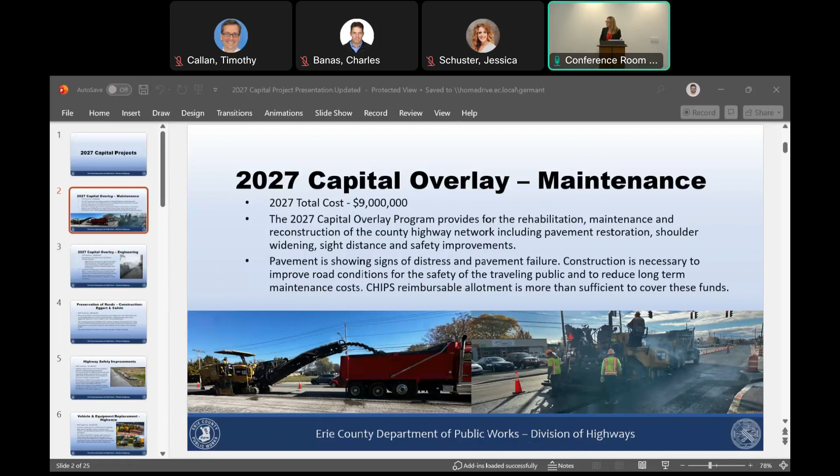Any questions on this one? Our second request is similar. It's the capital overlay engineering. These are the ones that are designed and bid out. You'll often hear us talk about overlay A or overlay B on our more heavily trafficked roads that need a little bit more work. We are requesting 10 million.

Some of the ones under consideration to receive this funding would be Ridge Road from Abbott to Seneca. This area needs some drainage work and resurfacing. Also Eggert Road from the City of Buffalo line to Main Street, which has a road score of 5. Ridge to Abbott has a road score of 6. We also have French Road from Union to Transit under consideration, with a road score of 4. Or any other capital overlay that could be considered with that funding, which would include resurfacing, drainage improvements where needed, safety, and inspection.

I have a question. If this was approved at $10 million, what are we looking at, one project, two of the projects? This would likely not be all of them that are listed. My understanding is the ones closer to ready would be Eggert and French, so potentially looking at 2.

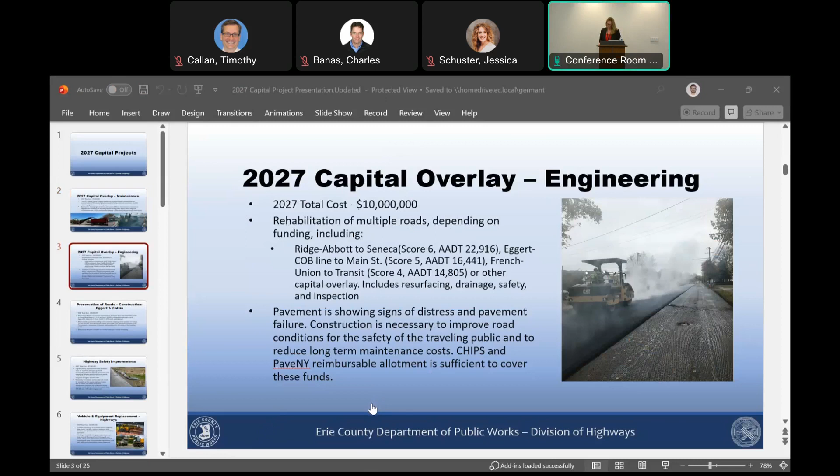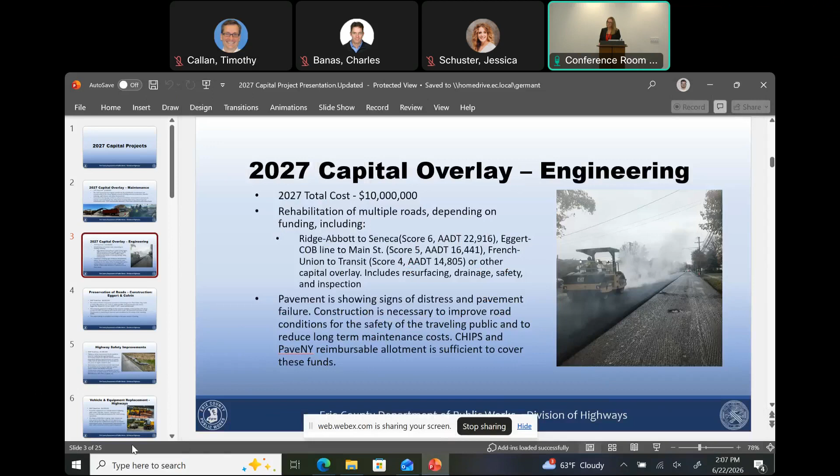Any other questions? And just to set the table too, I think our CHIPS, the whole emergency winter weather recovery CHIPS, pave over potholes, is for reimbursables almost $21 million. You get a chance, can you send me the new letter? Yes.

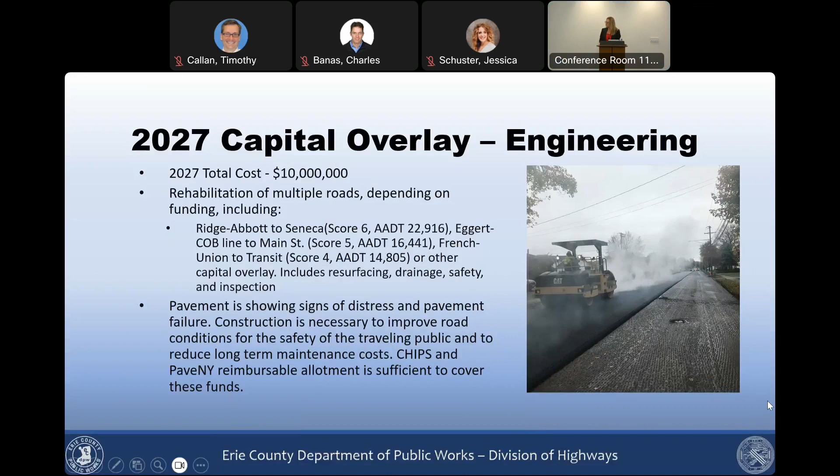Our next request is probably very familiar to a lot of people in this room. This is for construction of Eggert and Colvin. If you're familiar with this stretch, this is between Twin Cities Highway and Colvin Boulevard. It is a short stretch and an expensive one, 0.42 miles. This is the one that has a significant amount of concrete underneath, and also has 8 lanes going across, at the junction of the I-290 ramps.

We've done some emergency joint repairs, but the pavement continues to deteriorate and construction is necessary to improve road conditions. The design is complete, so it would be ready to bid upon receipt of the funding if we receive it.

Would this be replaced with all blacktop, or do we also do concrete? This one would be all blacktop, right? So it'd be a mix, I think, of concrete and blacktop. The concrete, I think it's almost 30 years since it was last rehabilitated. They'd have to remove all of it, but New York State DOT... this one moved up quite a bit from last year. Is it because of the deterioration?

Yeah, and New York State DOT is doing the north section basically from the 290, just north. We only own, like Karen said, the 0.4 of a mile, but because it's 8 lanes, it comes in at almost a little over a mile. But DOT is doing Twin Cities Highway all the way north this year.

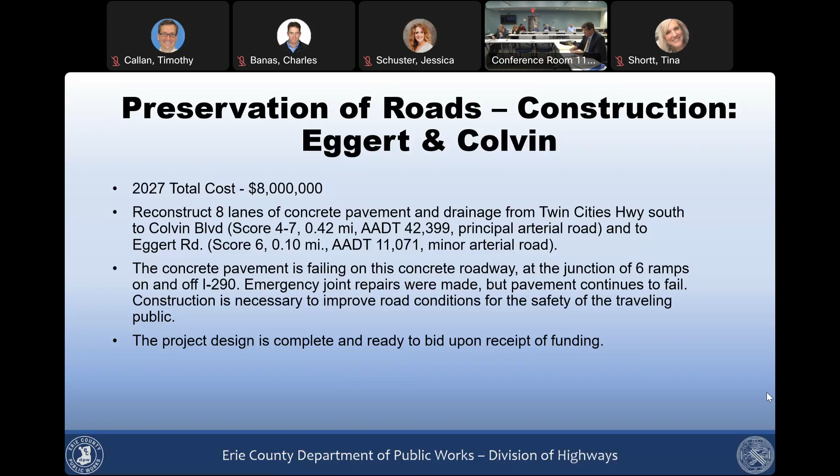The next request is for our highway safety improvements. These funds are used to replace damaged guide rail and correct recognized highway deficiencies, as well as upgrades to highway appurtenances and anything that is a hazard. For reference, we have 157 miles of guide rail, and we're constantly replacing it. Any car accident or damage that happens to the guide rail, we're replacing it, and we typically use all that we're allotted every year for these improvements.

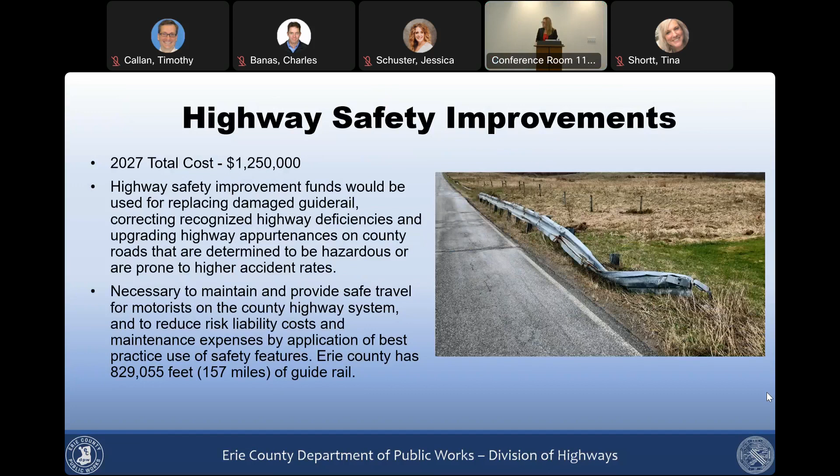Next request is for vehicle and equipment replacement. This is the same amount we requested last year. As you know, we're looking to replace at least 5 of our plow trucks every year. Those costs have gone up a little bit; our plow trucks are $300,000 each. We try to get a new one for each maintenance district, then we have to outfit them with sanders that are $25,000 each.

We mentioned the paint rig in here for our in-house striping. It's operational this year, but it's a matter of time before it needs to be replaced. That cost can be over $700,000 for that piece of equipment.

We've got some specialty equipment that needs to be replaced across the maintenance districts. We have a cat dozer as old as 1991 in our Clarence district, a $250,000 piece of equipment. A road widener, which we've used in one district, we're looking to get for one of the northern districts that often uses it to widen roads—that's another $250,000. We're also looking at a 20-ton roller to replace another 30-year-old outdated one in the Clarence district, over $200,000. We're also considering purchasing a grapple truck.

We're always trying to identify opportunities for grant funding. We were recently successful partnering with DEC for grant funding that got us a horizontal wood chipper we'll be able to purchase with funds in 2027. I bring up the grapple truck because that's something we'd get a lot of use from, knowing we could move it around the county. We often have to deal with fallen trees, windstorms, and helping out some of the towns. So that request is in there as part of the total request for equipment.

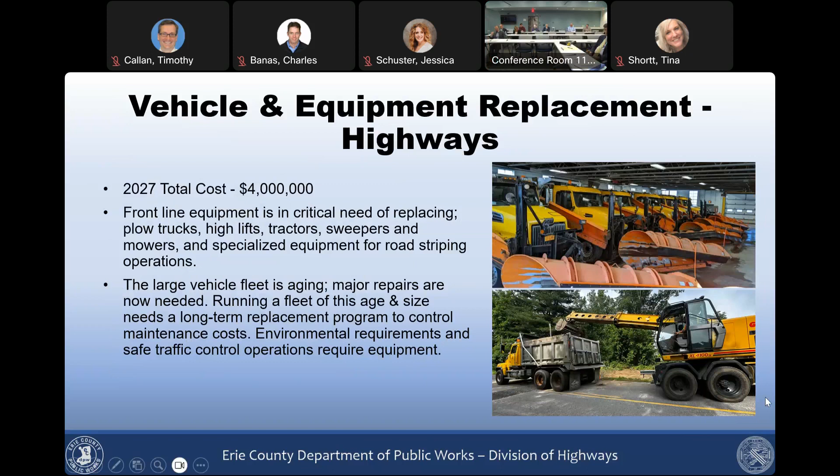Our next request is for federal aid Bridge New York construction funds. The total cost is $11,760,000. The county share would only be $2,432,000. The Bridge New York projects for construction are Boston State Road Bridge, Glenwood Bridge over Graff Brook, Glenwood Bridge over Sprague Brook, Neal Road Bridge, and other federal aid or Bridge New York projects.

They're all in various stages of deteriorated condition and need replacement.

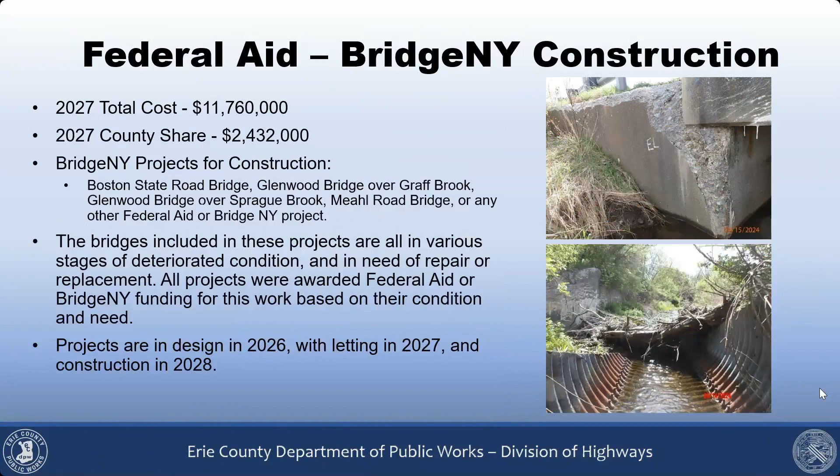They have been awarded through Fed Aid or Bridge New York, and according to the condition assessments, they're in design in 2026, and depending on which bridge, they'd be bid either in 2027 or 2028, depending on how much funding we have. Could you discuss the process for determining which bridges are included? I know a certain amount is dictated by the feds, and which ones you've submitted for are going to be funded, with often a lot of lag involved.

We submit the eligible ones for Bridge New York funding. Last round, I think we had 7 approved. Correct, 7 were approved. That's based on where it's located, but also the condition it's in. Bridge ratings go from 1 to 7 based on their condition.

A 7 would be a brand new bridge. The ones in the 3 to 4 range are in severe deterioration, or maybe they've received a red flag and we have to reduce the load posting or even close it down because of the deterioration. Bridge New York's MOU typically only allows us to get awarded 4, but this last round, New York State DOT was sitting on a large amount of Fed aid funding, so they asked for more candidates, and every candidate we sent in got selected.

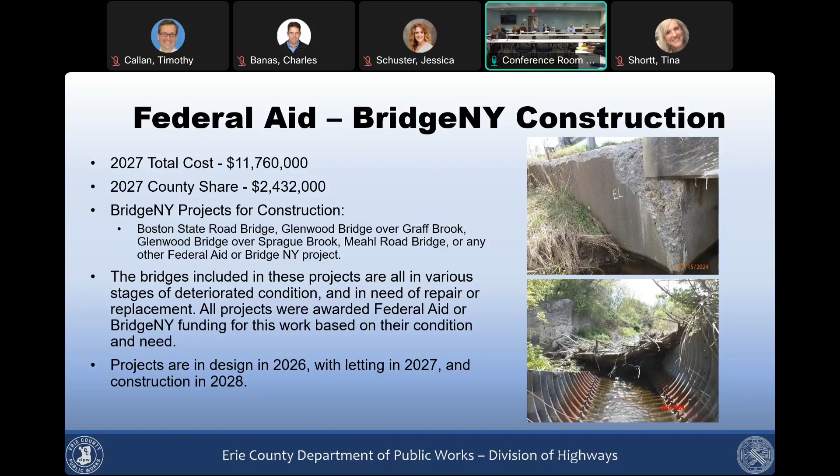We've recently talked a lot about the Maple Road Bridge. This would be a project that falls under this request for our 2026 money, when you're replacing a wearing surface or bearings or substructure repairs to concrete, things like that. This is a regular request that we have every year and use all of it throughout the county on various bridges.

I would just say for this one, going forward, is it possible that for all the existing projects that fit into the federal aid bridge preservation construction, we can get a list of where the status is on all of those? Mainly because in the last question you had answered a bunch of these with Sharp, Goodrich, Dennis, Eden Road, Marshfield, and so on. Just noting that there is a significant amount of funding that has not been spent over the last several years. Not to say it's not in process, but it would be nice to have a specific status update of where those all sit.

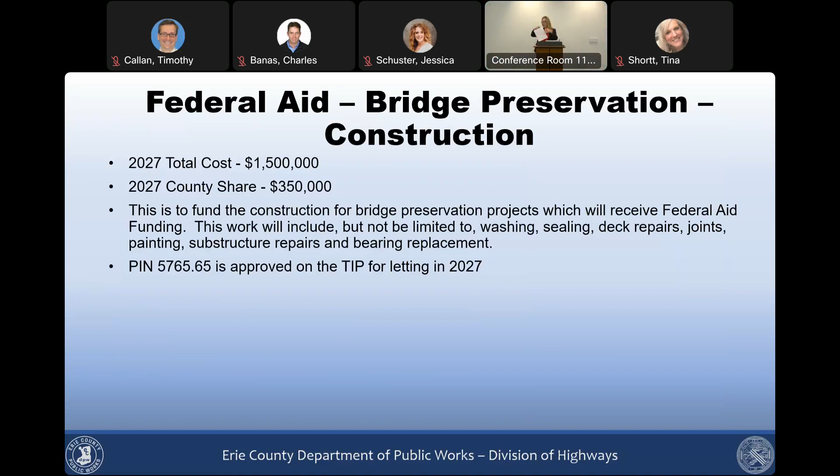The next request is for preservation of bridges and culverts, for construction for the repair and rehabilitation of flagged bridges and culverts. We're requesting $350,000. This project funds construction of repairs and rehabilitation of structures that must be completed based on our bridge inspection reports. We own 296 bridges, 284 vehicular and 12 pedestrian bridges, and 486 small highway bridges.

So basically when we get a red flag, or hear that a bridge joint was hit by a plow or something that needs to be repaired very quickly within the 6-week time frame, this is the money that we use to make those repairs. And Mark, just to anticipate your question too, a lot of that money dates back almost to 2017. Those funds, because they can be used on large culverts, the funding from this would group together those smaller balances, $17,000 to $50,000, that were rolled in, so our ask is a lot less because it funded the construction and preservation of large culverts.

On this, the flag bridges and culverts, can you just quickly give me an example of like, you had mentioned the red and yellow flags, what are examples of how that gets determined?

New York State DOT inspects all our bridges. Depending on what kind of bridge it is, they're inspected every other year or every year. Based on those inspections, if there's something they see that is deemed a red flag, they notify our department right away and essentially put us on notice with the DOT that it needs to be addressed within 6 weeks, or immediately if needed.

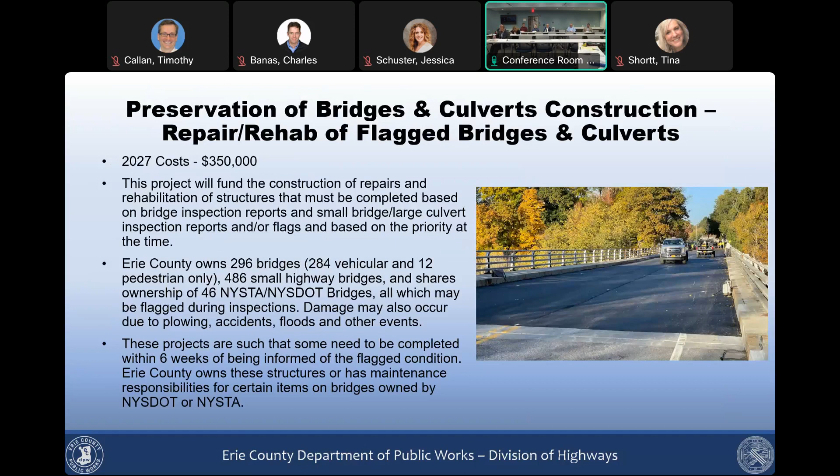All right, next one is for as-directed emergency engineering design services. Our request for this is $250,000. This funds the design and repairs we just mentioned, ones that come from issues identified on our bridge and culvert inspection reports, for flags or hazardous conditions that are found.

It allows us to get the design moving for some of these repairs. Some of the things we talked about don't all require design, but the majority do, and we're able to get those designed and addressed quickly with these.

Is there any specific plan with the existing dollars to be committed or spent? I just know, at least the last several years of this, not to say it's a lot of money, but between the 23, 24, and 25 awards, there have been $0 spent.

You got that sheet, Bill? Yeah, there's a lot that's gonna be used, I think road culverts, a big one that popped up, so doing some of the repairs.

What there is, and this is the nice thing with some of these, is there's flexibility that we can use it for, not just bridge design when we get flagged, but also on the construction repair side. So we do ask for it, but it's one of those things where we've had emergencies where we had to close a bridge and we're able to tap into this funding without affecting any other funding lines in the park.

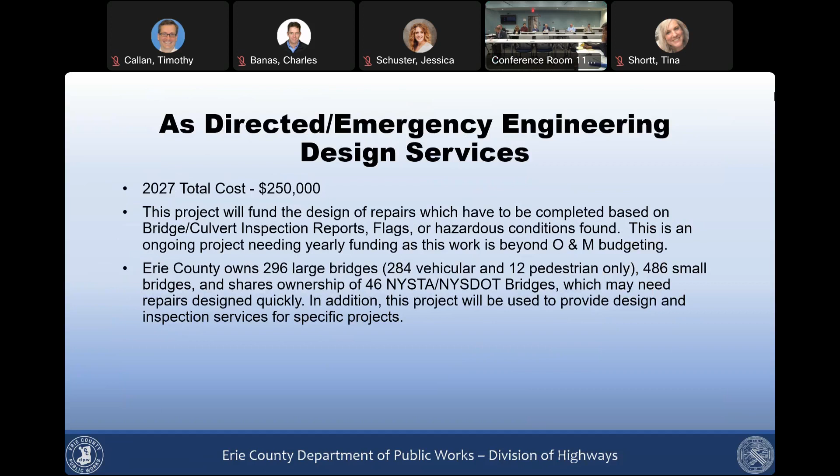Next, the request is for the large culvert and small bridge and pedestrian inspection program. This is our inspection program where we have small bridges and large culverts, anything from 5 feet to 20 feet, and we have those inspected every 2 years.

It's distributed over a 4-year program. The inspection of these structures follows the New York State Department of Transportation recommendations for frequency to ensure safety, and they're used to determine conditions and aid in prioritizing repair and replacements.

The funding needs to be in place for 2027 so inspections can begin immediately in 2028. Our existing contract extension goes through 2027 and will use all of the existing funding we have remaining. Without additional funding, we won't be able to schedule the inspections that need to start.

So that's like a term agreement? Yeah. Who do you do it with? Popley? Popley was the last one, yes.

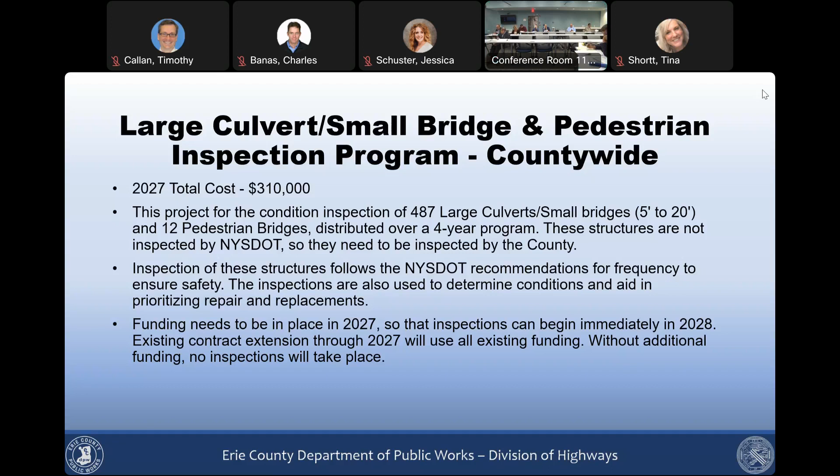Design has begun, it's at 30% complete. This would be ready to bid in late 2027 with construction in 2028. Just remind me, I don't believe when we discussed this last year that FEMA funding had been approved. It had been approved.

Flooding. When was the flooding? It was... how far back is this? It goes pretty far back, might be like 8 years ago. It's been in the works for a while. It was similar to the Tonawanda Creek, where we noticed the stream issues before the bank fell.

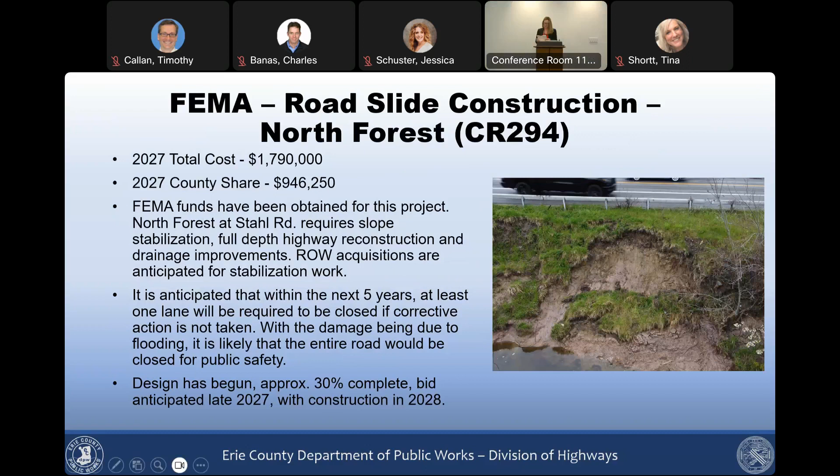Our next request is a federal aid request for road construction for Rapids Road. The total cost is $7.5 million. The county share is only $375,000. This one's unique in that it's a 95-5 split, so we'd only be responsible for 5% of it. Rapids Road is from the county line to Route 93 in Clarence and Newstead, and the federal aid funds obtained are from the roadway departure program. This includes shoulder widening, new pavement, and drainage improvements throughout that stretch.

And the project is on the TIP for federal aid. That's it.

And the previously existing funding is just for the design work of this project? That was the retaining wall. Oh, okay, so it's a separate Rapids Road. Yeah, it's another Rapids Road, and that one, I think, was at the legislature toward the end of the session. This is another one that would be bid in all of '27, which means construction in all likelihood would not be until '28.

Is there drainage associated with this, or is it just...? Drainage improvements, but not total drainage replacement.

What's the road score? It's actually a higher road score. It's the drainage, I think, that is the actual issue. This is just over 4.5 miles long. Doesn't get a whole lot of traffic, but the drainage improvements and the width are worse than the score. Widening is probably the bigger part with departure. I think it's only like 16 feet in some areas, so it's 2 8-foot lanes. It's not a lot of county money to take advantage of the Fed, I get that, but this is not a heavily traveled road. No, it's not, less than 1,000.

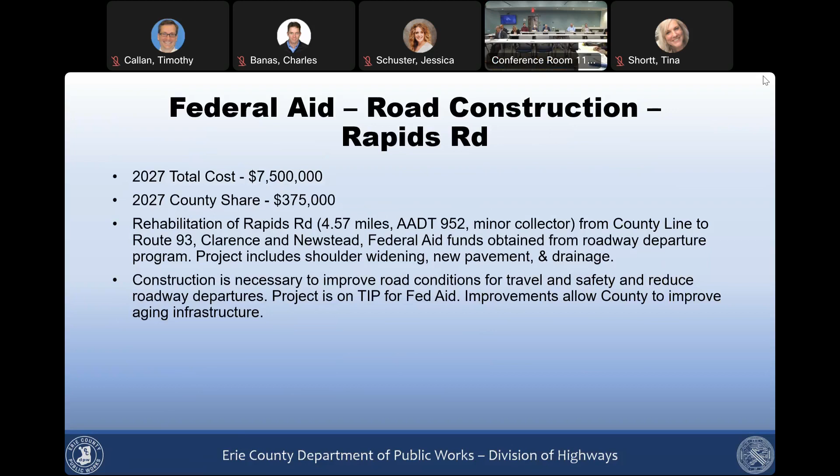Any other questions? Okay, our next request is for on-call general civil survey and geotechnical services. The request is for $250,000.

That's number 14 because you removed 13. Oh yeah, 14 was removed. 13, yeah, 13. So the first Zoar Valley site 1, they're no longer requested.

So the request for on-call general civil survey and geotechnical services is for $250,000. The project is to allow retention of up to 2 firms for the provision of on-call general civil survey and geotechnical professional services. The current contract expires in 2027, and having firms under an on-call contract allows us a timely response to unanticipated events that typically recur on an irregular basis and require attention.

It was the whole contracts. We currently have, is it Bergmann and...? Colliers now, yeah. Is it? Okay, it's GPI, yeah. And I think the cycle before we had the same 2 also. How much for that are we using annually?

A lot of it's being used for the geotech issues in '26, so the $250,000 is still remaining this year. Yeah, that's just Brent. Yes. Previous year's spending.

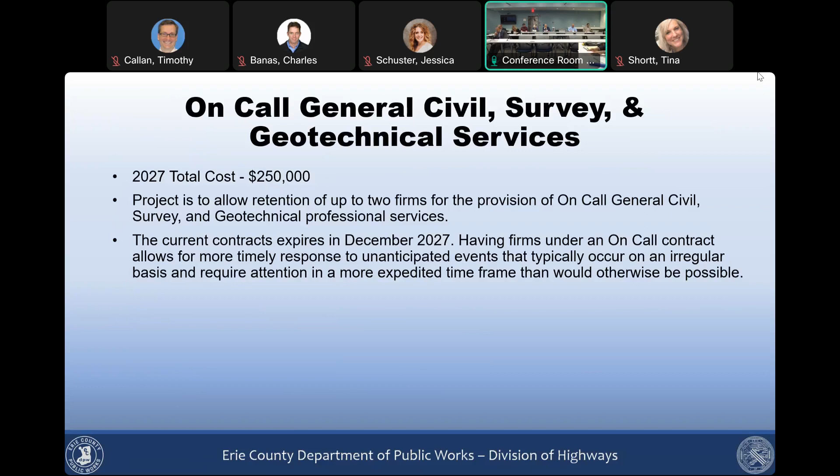Any other questions? Next request for dam compliance rehabilitation design funding for the Springville Dam. The total request is $1.2 million for the rehabilitation design for Springville Dam to address spillway capacity, stability, and incorporation of a low-level outlet and various other safety and compliance-related repairs.

This is required to bring the dam back into compliance. Design could begin in 2027 and progress through 2028. We had planned on using an incremental approach with multiple contract lettings to address the issues that are keeping us from being in compliance.

Now, I'm looking at the total cost. $69 million. For the dam? Construction? I thought it was supposed to be 14. Well, I got it here, it says 69. Maybe I'm looking at... oh, I'm sorry, I'm looking at all the preservation of large culverts.

But there is going to be substantial construction. I think Springville's total, but that last agreement to get into compliance is probably going to be in the neighborhood of $14 million to make it compliant.

We have... that's, and then a lot of that too has the sedimentation - that's about the size of the dirt we took out for the new stadium. 100,000 cubic yards behind that. We have to put that somewhere, right? Yeah, because it could have radioactive isotopes with what's upstream.

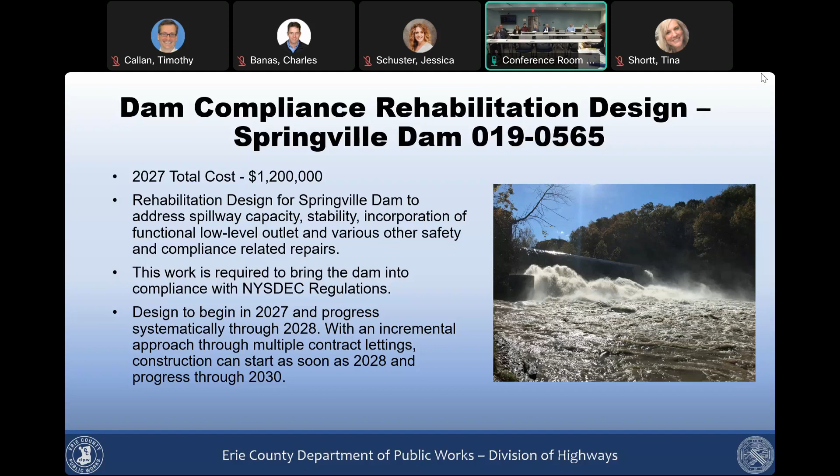The next request is for the preservation of large culverts for construction. This is a continuous request that we come with every year. The request for 2027 is $10,600,000. It's a large-scale program to replace our large culverts and small bridges throughout the county.

Potential culverts for 2027 would be ones on Feddick Road, Fletcher, Trevett, West Main Street. We've got a long list. We've got 25% of our large culvert inventory reaching the end of their life, and we're requesting this amount because it's what we feel we could accomplish in any given year when it comes to construction funding. We typically bid these in culvert groups, putting a few together at a time to replace the ones that are part of that 25%.

What about the 5 culverts it says are currently in design? Does the $10.6 million cover construction for those 5? In your description it says 5 large culverts are currently in design for replacement, and additional RFP for design of 10 culverts is being issued.

In early 2026, what would $10,600,000 get you, and would it cover the 5 culverts currently in design? It would cover, I think we'd be able to do almost 10, as we discussed, given the cost of some of them. Some are less than $1 million, some are over $1 million. But ideally with 10, our goal is to be able to replace around 10 every year.

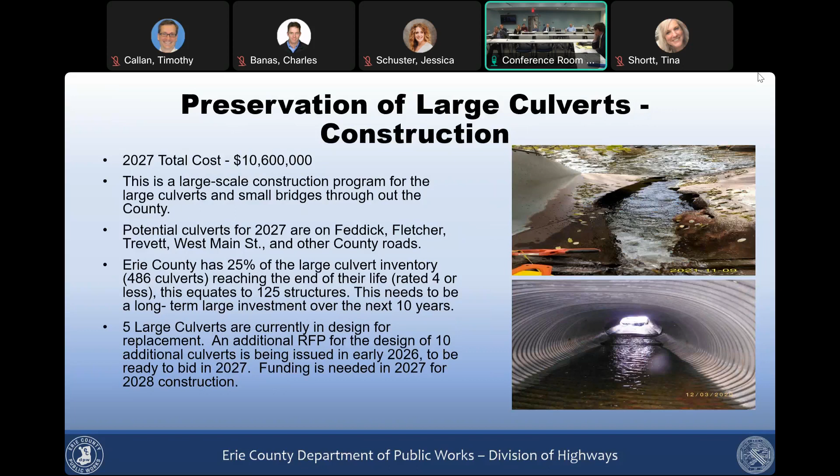Next, bridge and culvert preservation, this is design funding. We're requesting $750,000. This is design funding for federal aid bridge preservation projects or capital culvert projects. Bridge work will include but not be limited to bridge deck repairs, overlays, deck sealing, joint bearing replacement, and culverts that need repairs or replacement. This is the design phase for bridge maintenance projects currently on the TIP, and there is no state or federal money available for the design phase of these project types.

How many bridges and culverts would you get with the $750,000 design funding? We'd get 10 culverts, and I'm not sure how many bridges, but we definitely would get about 10 culverts this fall.

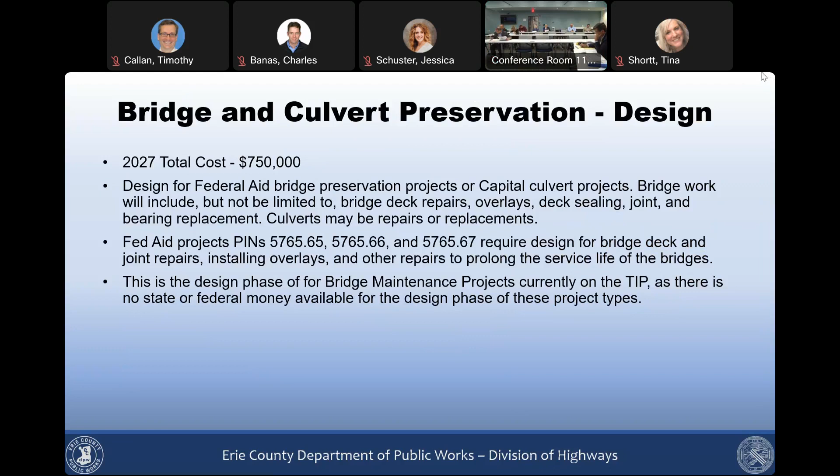Our next request is for preservation of roads, the general road design program. The request is for $2.5 million for 2027. This is for design of one or more roads, retaining walls, or supporting roads, depending on what funding we receive. Some of the candidates include Ransom Road from Main to Stage, Eggert, Wehrle from Transit to Harris Hill, Waverly or any other county road, and French from Union to Transit.

The $2.5 million would allow us, depending on the project, to accomplish some but not all of these. How many do you think with the 2.5? Looking back, we could probably do 3 or 4. And then the ultimate construction associated with any of these designs, that would be 100% local share.

Yes. I'm a little confused, it's $2.5 million for design, correct? Yeah. So you're saying you'd only do one or more? You're going to spend $2.5 million to design a road? No, we could probably do 3 roads. Yeah.

We spent, just for instance, $500,000 for the culvert Eggert design. Dodge, that's out now, that was about $299,000. These are all roads that are in the 5 to 6 category.

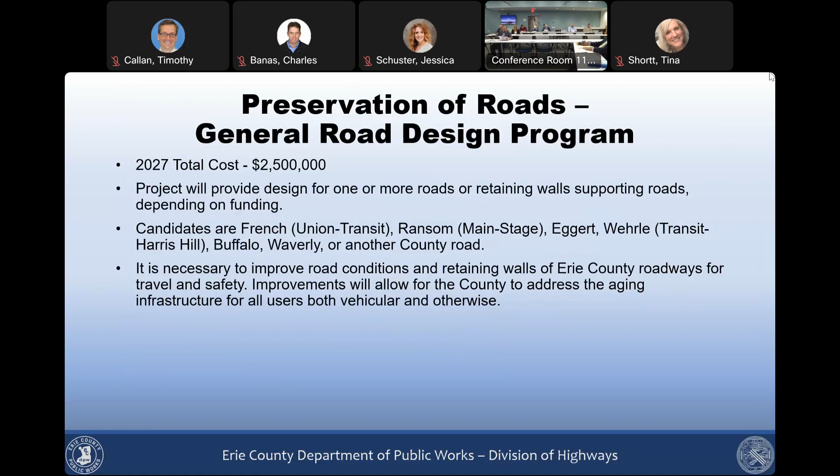The next request is for road slide construction funding for Zoar Valley Road, what we are calling Site 2. This is a request for $500,000. The rehabilitation is to address road slides caused by subsurface movement and stream bank erosion. This is something that we continuously face on this road. Site 2 is located about just more than half a mile over from North Otto Road. Due to the continued movements, there's regular maintenance that's required. We need a longer term repair to fix it and keep the road stable, to keep it from being shut down.

I will reiterate what I said in the past. This makes no sense to continue to invest millions of dollars in Zoar Valley on a road that is built on shifting land. It should be closed.

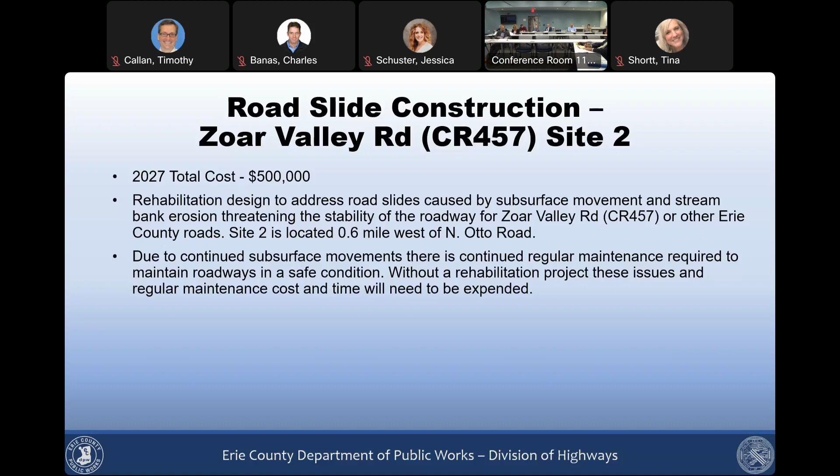Our next request is for capital right-of-way funding for 2027 for $100,000. This is for right-of-way acquisitions, appraisals, by fee or easement approved by the county attorney to facilitate various road, bridge, culvert, dam, or other projects, including maintenance and preservation projects. It's necessary at times to acquire right-of-way for various projects that we undertake to improve, maintain, and repair the road. This often happens with some of our bridge projects where we need to take a little bit of right-of-way to complete the replacement, and it's something that pops up through lots of our projects.

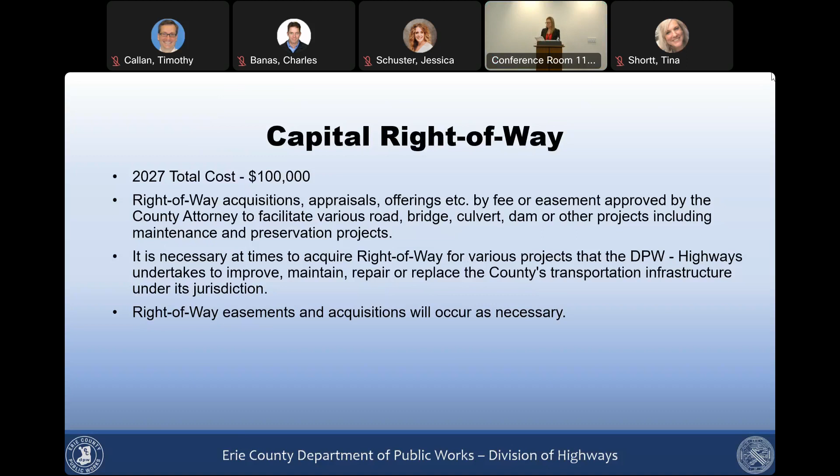Our next request is for preservation of roads, construction funding for Goodrich and Clarence Center. The total request is $6.4 million. This is for the rehabilitation of Goodrich Road, which has a road score of 6 and is about a 0.42 mile distance, seeing 7,692 cars a day. And Clarence Center, which has a road score of 7 to 8 and is 0.60 miles from start to finish there in Clarence Center.

The road scores sound like they're a little high. The dominating issue in this area is the drainage that needs to be replaced. This project would also include obviously paving, but also total curb replacement in this area. The drainage is failing on both of those roadways, and construction is necessary to improve road conditions for traveler safety and for drainage improvements.

The question I have is in relation to, we've been doing a lot, it seems like, of complete reconstruction with drainage. I'm just wondering, can these roads be repaired without drainage, which would easily knock off millions? More than likely not, it's all enclosed drainage. This is particularly in a hamlet, so we couldn't put open ditches in there. The curbing, this goes with French Road and all the others—probably the drainage dates back to the 60s, if not even the 50s, and it's metal CMP pipe. The drainage has stormwater issues, but also tie-ins that come from roof leaders and homes.

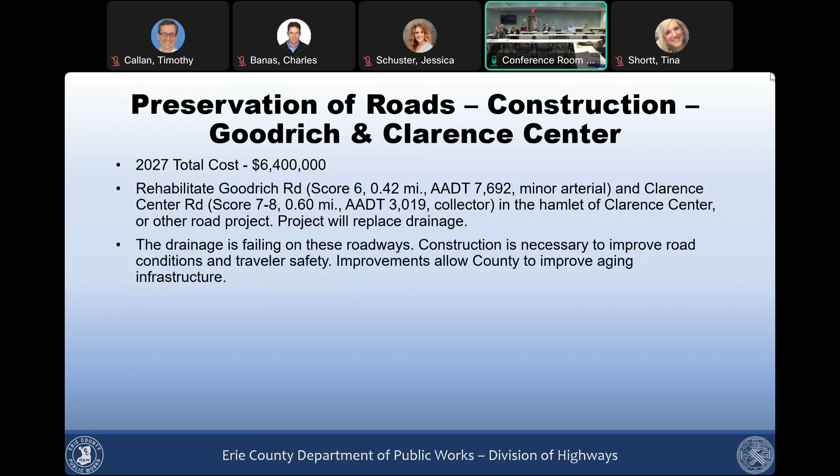Any other questions?

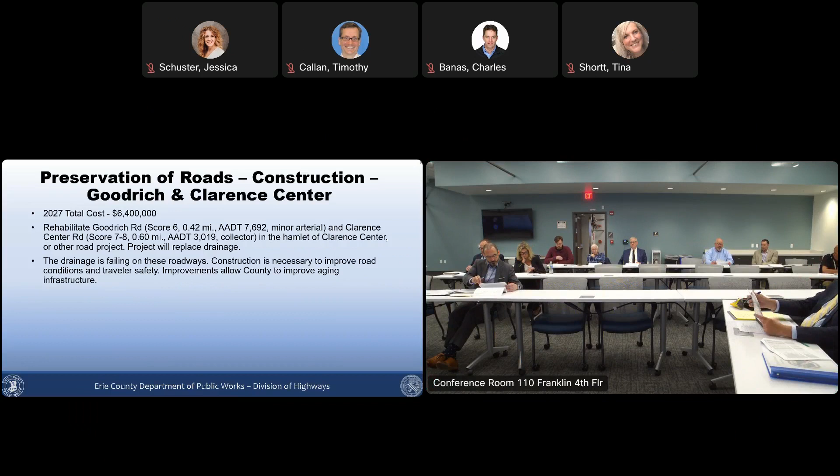Our next request is for capital bridge design funding in the amount of $500,000 for 2027. This is for the design of our capital bridge replacement or rehabilitation program. These are bridges that don't get the benefit of state or federal aid and would start design in early 2027, with bidding in 2028 and construction in 2029.

We have 284 highway bridges, and some of the bridges that would be designed are mentioned in the next request: Warner Gulf Road and Youngs Road, over Ellicott Creek.

What is the difference between capital bridge design and the preservation of bridge and culvert preservation design? Both of them are noted.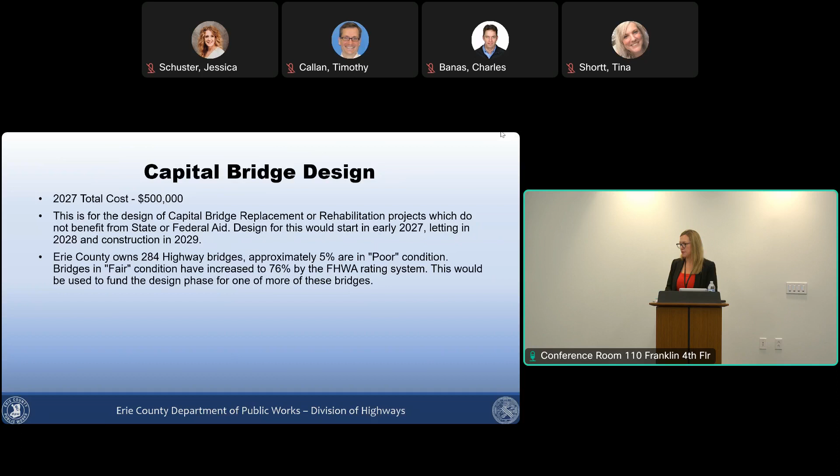So these are our bridges. The culvert ones are the ones that are a shorter span. These are our capital larger bridges that get a full replacement. So the bridge and culvert preservation design is really just for culverts, or small bridges. It's a technical term, but an important one, because that's what the state and feds use to differentiate.

The large culverts can go from 5 to 20 feet, which is really a bridge - anything greater than 5 feet. This request here is for bridges greater than 20 feet. So the capital funding is for the larger ones.

Also, to note, these are bridges that are considered off-system, so they're not eligible for state and federal aid. The description for the bridge and culvert preservation design also indicates there is no state or federal money in that - that's the point. Obviously, if they're eligible for state or federal aid, they go into one bucket. It was just the differentiation between these two that had no state or federal aid.

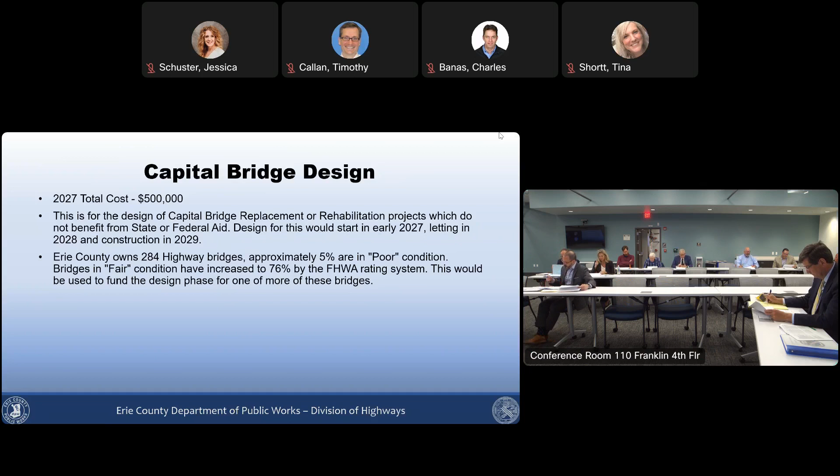So the next request is for preservation of bridges at multiple locations. This request is for $5 million. Again, these are ones that don't get the benefit of state or federal aid. Bridges like Warner Gulf Road over Gears Gulf and Youngs Road Bridge over the branch to Ellicott Creek are included, as well as any other bridge that would be identified.

They're reaching the end of their life cycle based on their condition rating or flags received in the inspection rating, and they need to be funded for construction when we don't have federal or state aid available. So the $5 million probably covers the two listed, and the design funding would design for both.

This is just for construction. Have we already designed these bridges? No - the first request, the capital bridge design for $500,000, would be designed next year, to complete design and then bid out at the end of 2027 for those two. Well, I'm confused.

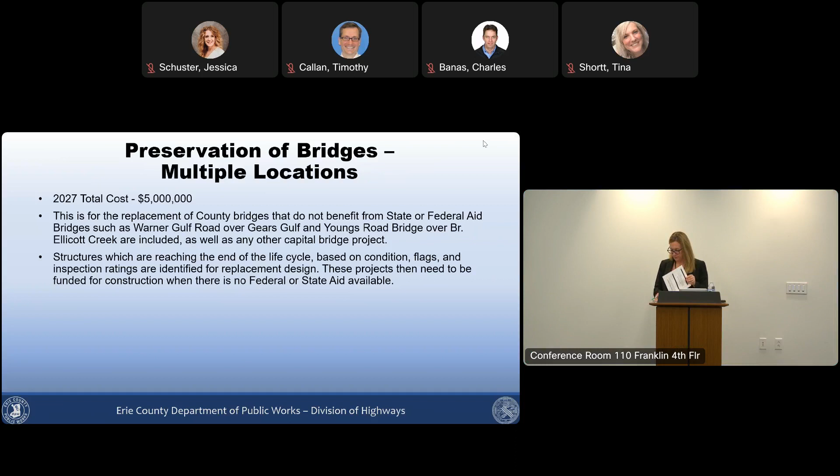If we're borrowing money to do design work in 2027, why would we borrow money to do construction, which wouldn't start until late 2028, maybe even 2029? Well, these would have to be bid in 2027 - it's just the timing of where it is in the fiscal year, to hit the end of the fiscal year. Because we can't bid it without the money being in there. So we'd have to approve it so design would be done so they could actually start construction in 2028.

Any other questions?

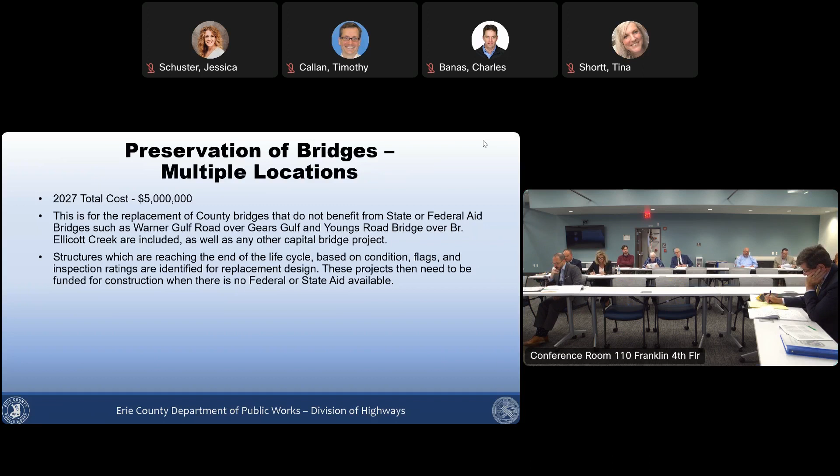Our next request is for the preservation of roads and construction funding for Dodge Road. The total request is $7,670,000 for the rehabilitation of Dodge Road. This is scored between road score 5 and 6. It's 2.62 miles, sees over 10,000 vehicles per day, and runs from Transit to Hopkins in Amherst. The project includes pavement resurfacing, total drainage replacement, shoulder widening, and updated ADA sidewalk ramps throughout.

The pavement is seeing distress and pavement failure. The drainage certainly needs to be replaced and is failing, and construction is necessary to improve these conditions. The design phase will be complete this year. It would be a phased project, so phase 1 construction, which we're requesting the full amount for, would be bid in 2027.

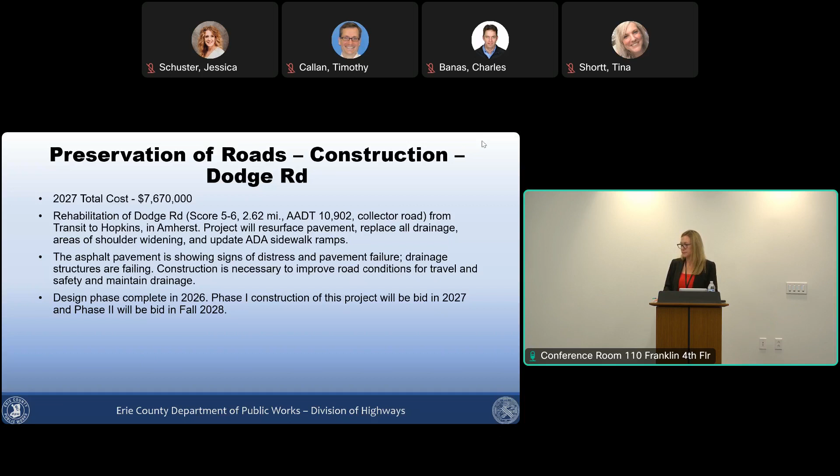Can you confirm how you ranked these? Because you have this one, the next is ranked 24, and 25 is the lowest rank. But it's a big project.

These are both projects that in previous years kind of get into that sprawl topic, especially in Amherst, developing some rural land. They're classified as rural roads, but they're huge developments where builders want to come in and put in monster houses. So on our ranking, other stuff is much more important to us. The road functionally works, it just doesn't meet the needs of some of those larger homes.

Sidewalks - and this would do what? This will widen that road. Again, these are probably 10-foot lanes with no shoulders. This will put in enclosed drainage. I think it goes to 26-foot wide, so it'll be two 11-foot lanes plus a 4-foot shoulder.

What if we just did a mill and overlay? We can do that. How much would that cost? About 500,000 a mile, so a fraction of all the roads - $2 million as opposed to $7 million for total reconstruction.

But it would have to maintain the same width, right? Which is something we don't have a problem with - it's the people who live there. We had some pressure. Both of these roads are in the town of Amherst. We haven't had this with the new supervisor, but the previous administration had pressure on us to try and upgrade these roads.

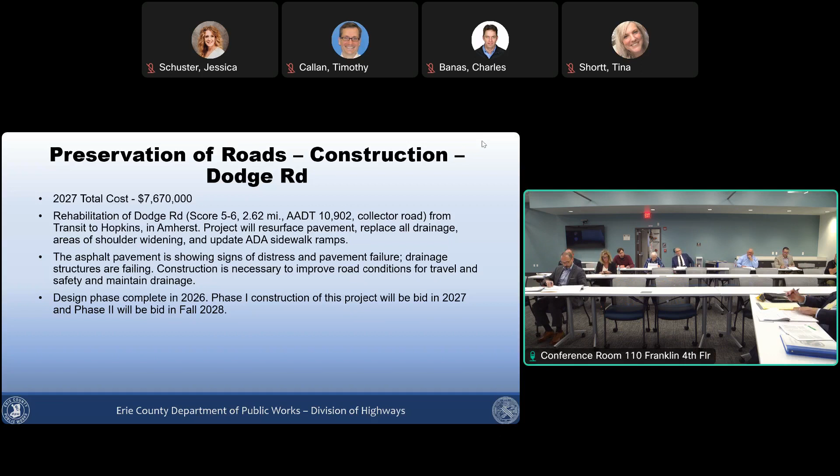Well, we already started doing the widening - we did phase 1. All right, New Road. Okay, our last one is preservation of roads, construction for New Road. We've obviously completed phase 1 of New Road, this is for phase 2. There is a third phase of New Road based on costs here.

Phase 1 was from Dodge to Smith. Phase 2, which this request is for, is from Smith to 1.2 miles north of Smith in Amherst. It would include widening the shoulders, enclosing the drainage, and pavement mill and overlay. This has a road score of 6, sees 3,875 cars a day, and would be 1.2 miles long for this request. It has narrow shoulders, and they're requesting that ditches be put in.

Correct - if you put the sidewalks in, that affects the road. But this developer didn't put the sidewalks in. Correct, and then they wanted the county to put the sidewalks in, which we don't do. Right, you never think that. I mean, if we could mill it and overlay it, we could definitely do a cold recycle, and it's been successful on a lot of those unstable, subterranean conditions.

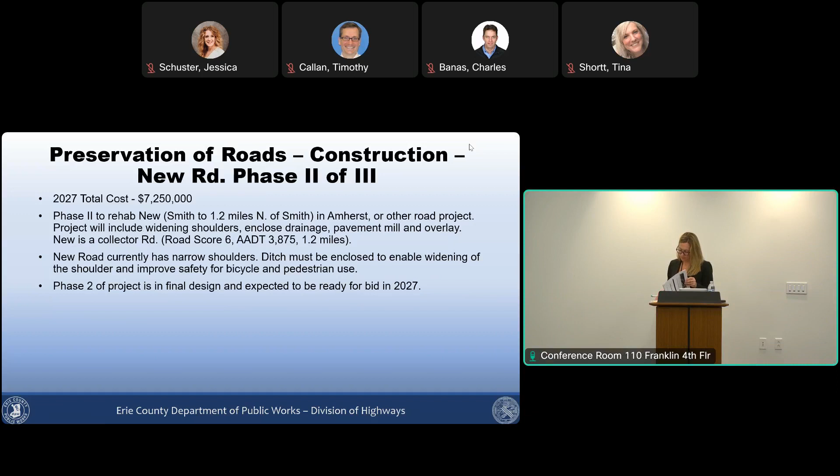What's the third phase? It's a short section - the 3rd phase is from the remaining 1.2 miles north of Smith, going to the county line. And that's based on future development, not current development. Those are homes, not businesses, right?

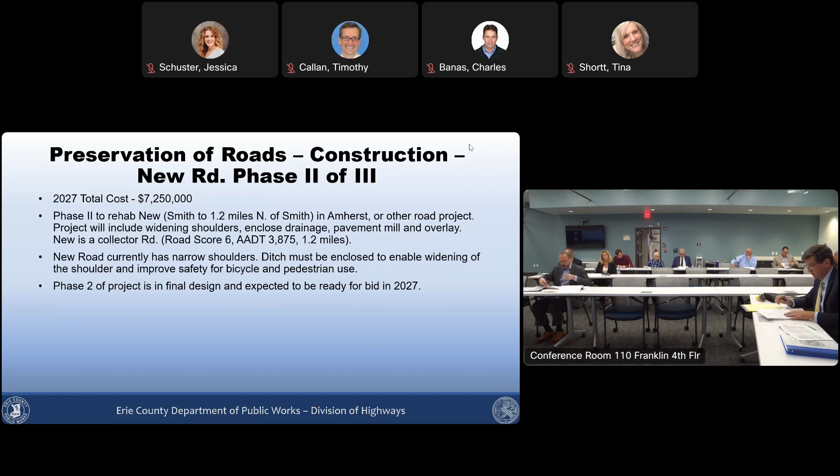Any questions regarding this one, or any of the other projects? Hearing none, we are completed for highways.